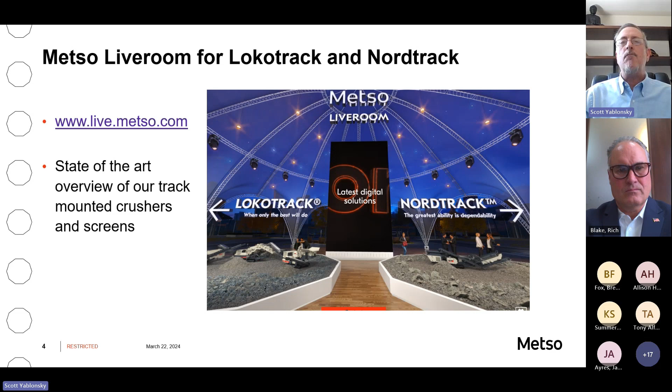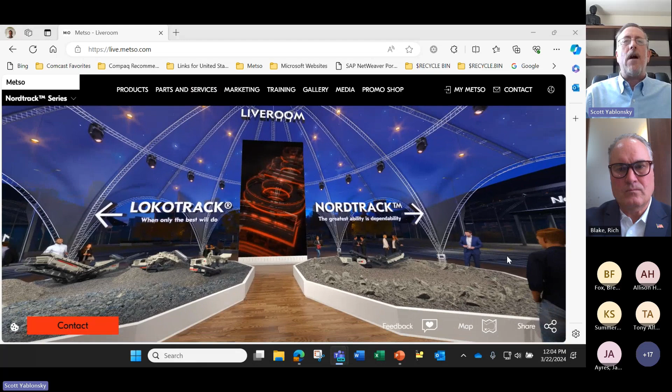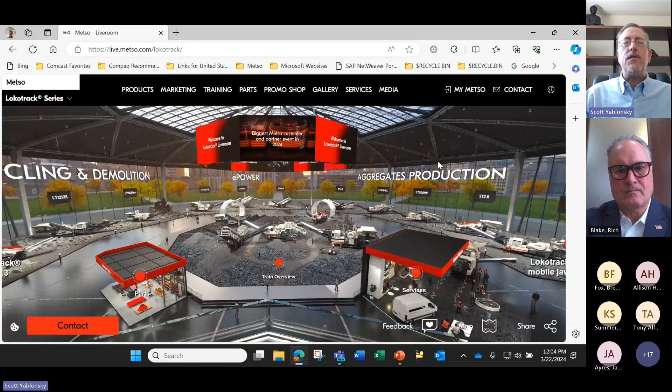So what we're going to do is go into the Metso Liveroom. It's our state-of-the-art overview of track-mounted crushers and screens, along with aftermarket, marketing, training, etc. When you type in live.metso.com, this is the screen that comes up. We have our Lokotrack and we have our Nordtrack. We're going to go into the Lokotrack. So this is our Liveroom. It's the state-of-the-art way to market our machinery, in addition to all of the technical specifications, what the machine does, the size, the capacity, all of that is included.

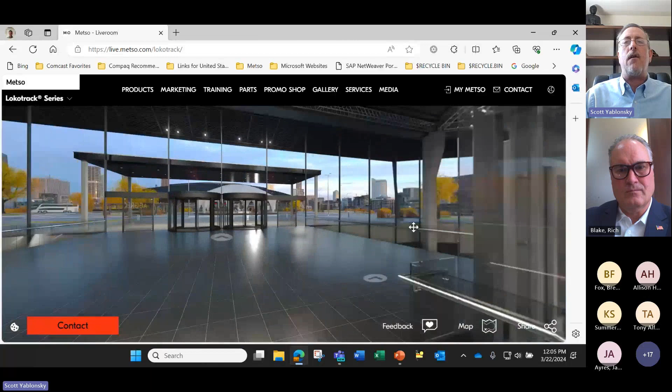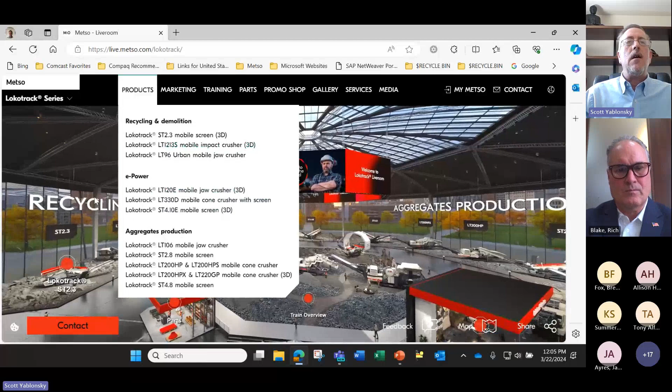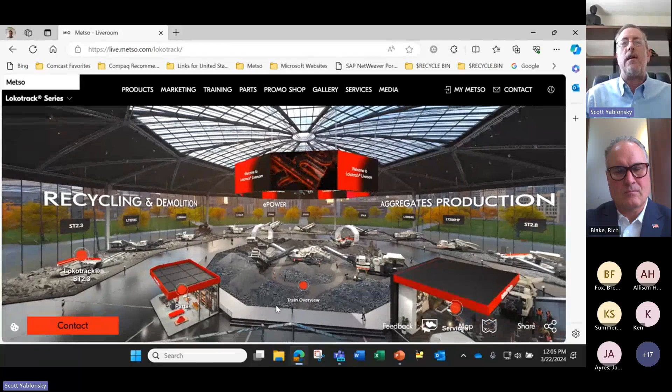So we can go around the room with our mouse, all 360 degrees around. We can also look at the products on this list right here. We have all our machines: impact crushers, jaw crushers, cone crushers, and screens, etc. This is how we make big rocks into little rocks. So we look at this ST2.3, which means screen on tracks. LT is a Lokotrack, which is basically crusher on tracks. We didn't call it a CT, unfortunately. And we can click on anything and find out about it.

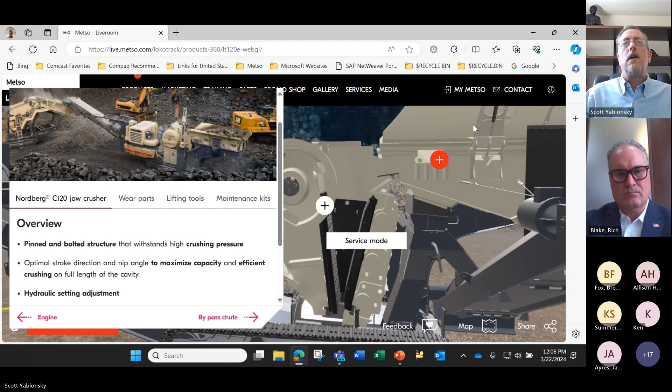This is a jaw crusher, the first jaw crusher in the process. You can just click on it, look at it in 3D, and we can rotate it as quickly as it loads, which is pretty quick, about 5 seconds. So we can go around the machine. Anything you have a question on, say, the jaw itself, you can see the jaw in action. That's how it works. There's also information. Let me go back into this. Anything that you guys want to know about this machine is in here.

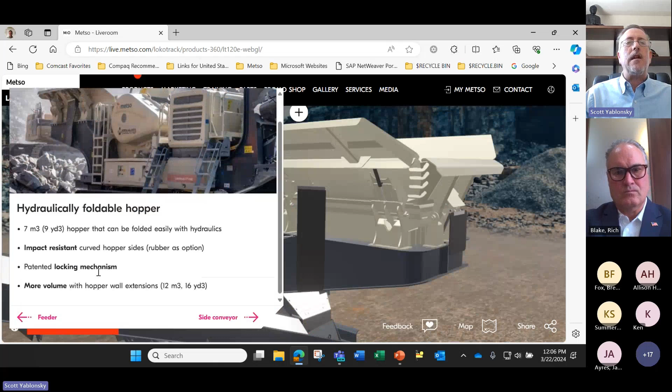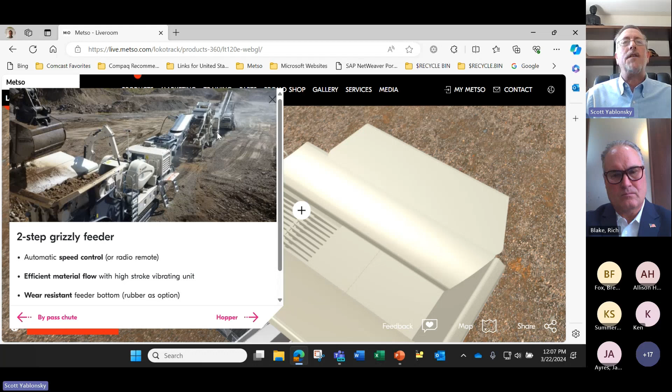You want to know about the feeder, which is basically sitting right here. You load the material on here. The feeder lets the smaller stuff go by because you don't want to crush smaller stuff, it's already small. So the rock goes into the hopper here. It goes over what they call a grizzly feeder. And the bigger stuff goes into the crusher, comes down, comes out this conveyor and feeds on to the next process part of the unit.

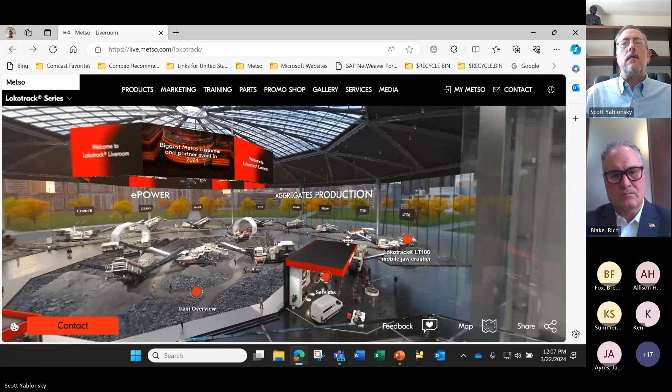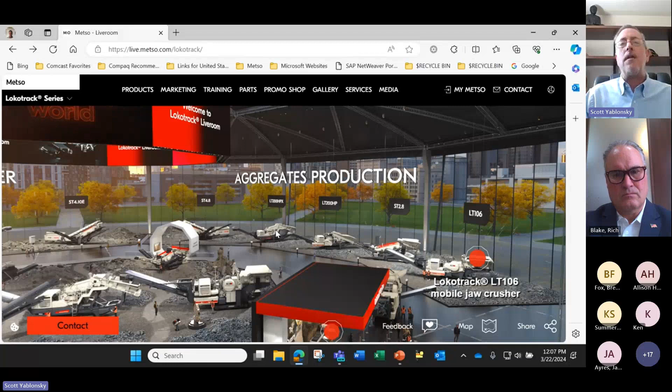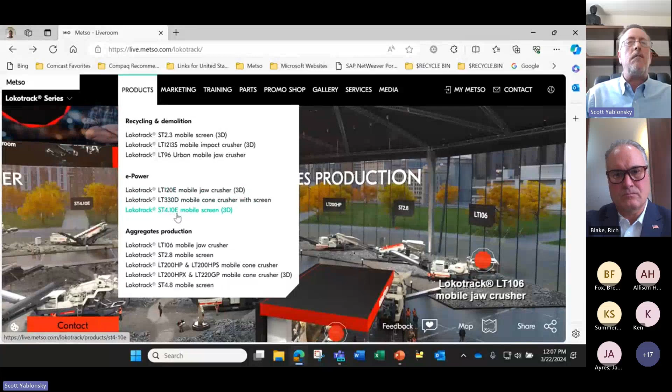Let's go into, say, a screen now. And this E nomenclature indicates it's a diesel electric. You can either push a button and start the diesel engine, or you can plug the machine in to the electric grid. It's basically like plugging in your TV. That's how it goes. This is the power source. We would plug it in and run the machine.

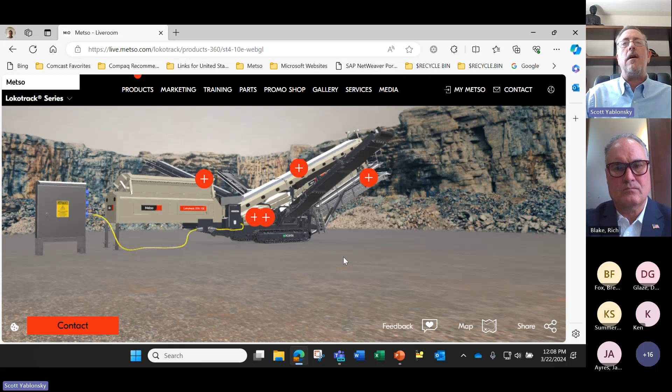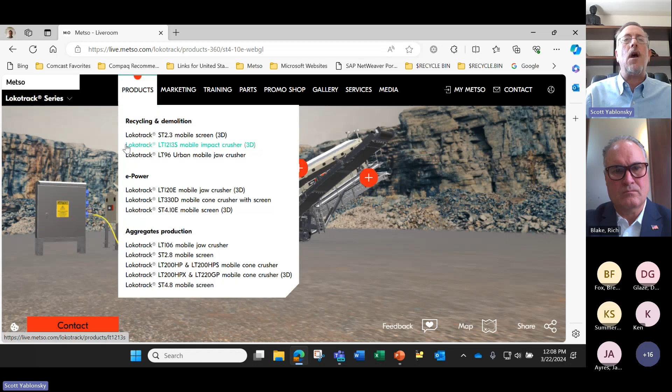We have marketing, we have training, we have parts, we have a promotional shop in here. We have services, screen media. So this is a one-stop shop for any track-mounted crusher or screen need that Metso provides. So that is what we call the Liveroom. I'll go into one other machine and then we'll move on to the next portion of the program.

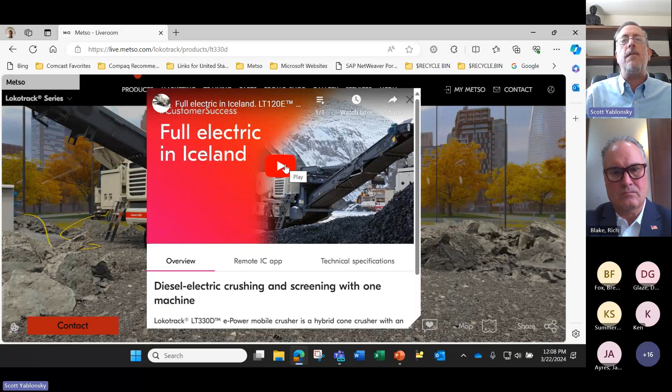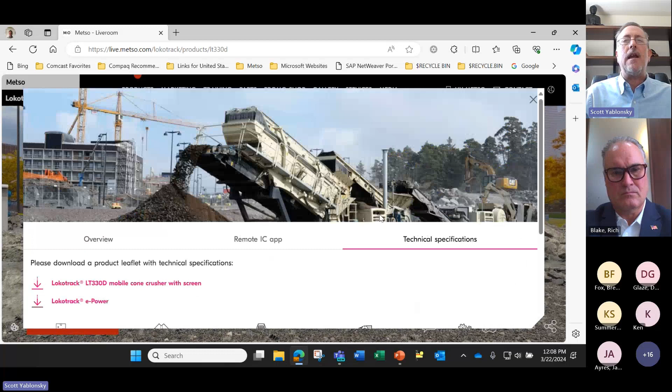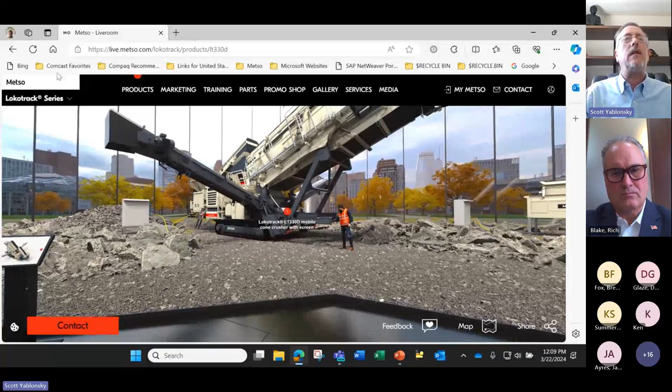So this, we can see YouTube videos. We have remote IC, which is a remote way to control the machine. Technical specifications on anything and everything on the machine. So like I indicated, anything and everything you want to know about this Lokotrack and or Nordtrack crushing and screening is included in this live room. And it's very, very interactive. Just like anything else on the internet, it's the way to go.

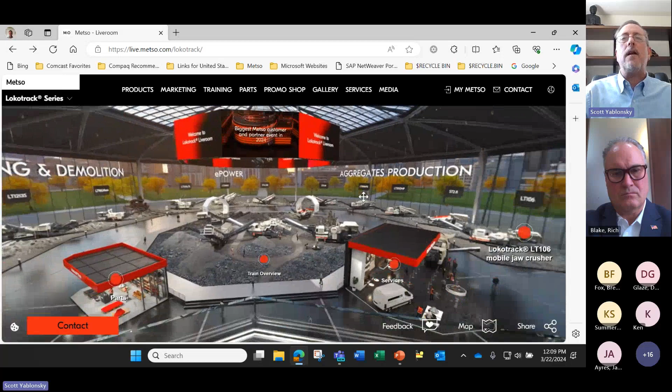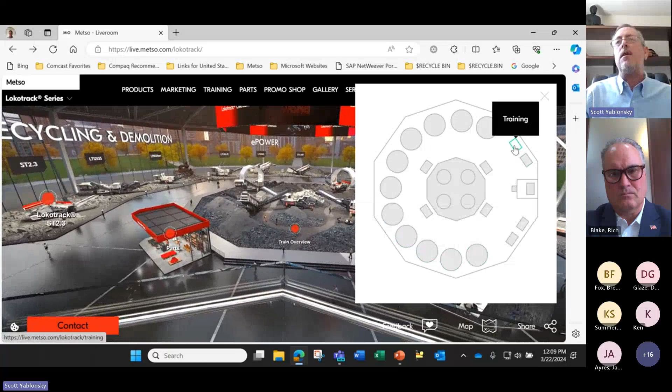Services is down here. You can hit a map to look at what you would actually like to review in the live room. Jaw crushers, impact crushers, screens. We have a marketing table, training, the gallery. So this is a perfect way to, at midnight, take a look at what we have to offer. And then you can call up Metso, ask them any questions that you have.

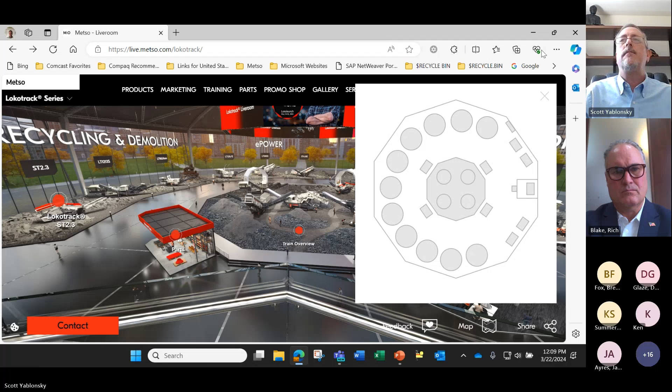So we'll move off of the Live Room and we'll go on to the next portion of the program, which is our HRC8. So this is the way we're going to do it. Metso Live Room, we just did it. HRC8, then we'll talk about Ag 1, and then we're going to introduce the 350E at Ag 1. So first, we're going to talk about this HRC8 crusher, which is one of the simplest crushers that we offer.

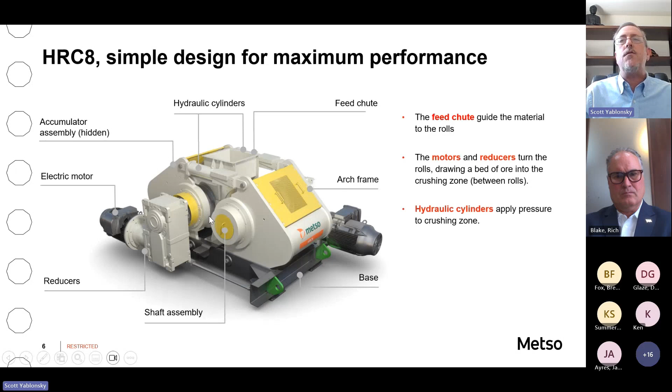This is the way it's manufactured. We have two motors. We have a feed chute that guides the material in between the rolls, and I'll get into how this works later. Motors and reducers turn the rolls, drawing a bed of ore or material into the crushing zone. So material goes in here via a conveyor, and then it gets crushed in between these two rolls, and hydraulic cylinders apply the pressure to the crushing zone.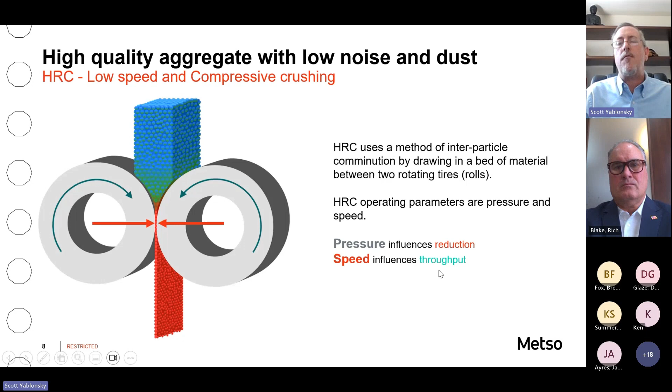The best part about this machine is it takes everything, all in feed. Usually crushers do not like fines because it's already fine material. So why put already fine material into a crusher? You would bypass that machine and put it into a stockpile where you would have a pile of the same size rocks. So you can put anything into this machine.

We have high abrasiveness, low crushability. You can put moisture in it. A lot of crushers don't like moisture. A lot of crushers don't like fines in the feed. A lot of crushers don't like clay or sticky feed. This machine can do it all. Like I said, the only limitation is the tons per hour or the production. It's flexible. It makes good shape. Very difficult applications. Very low energy consumption, low vibration, low noise. This is one of the simplest machines that we offer.

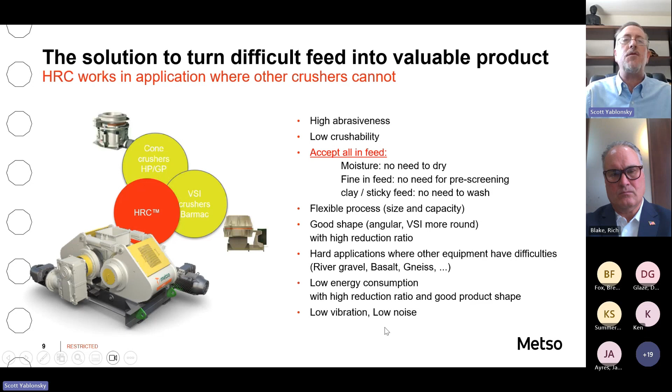For instance, if this is the feed to the crusher, both of these types of materials, and it's very small. This is millimeters. So you know how small 2 millimeters is. It's like that.

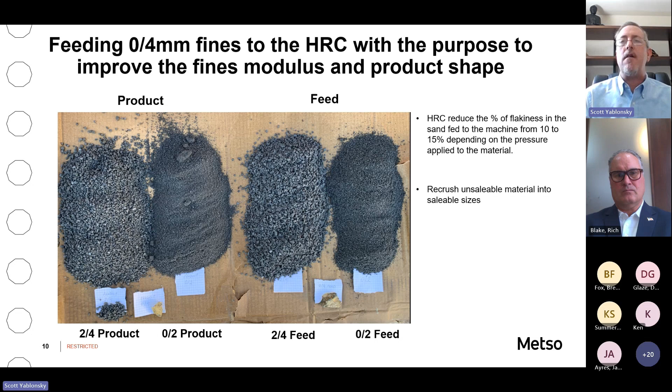The other well-known application for this crusher is recrush unsaleable material into saleable sizes. So if you happen to have, say, something called a 57, which is 1.25 inches by 1/2 inch size rock, and you can't sell that rock, well, put it in this machine and you can sell it. You can put 1.25 inches in, get 1/2 inch out, and that's a saleable material in most cases.

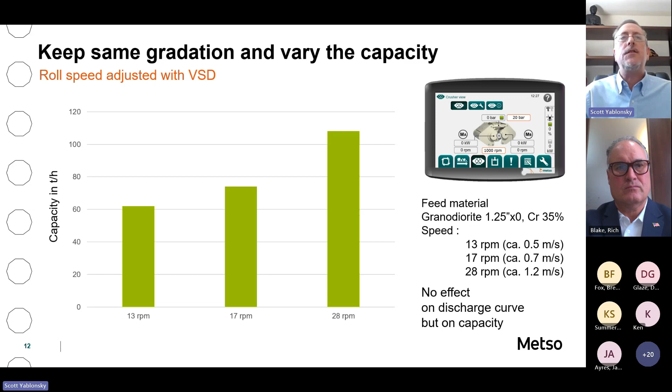Scott. Yes, sir. Setting control. Is there a setting control similar to what you might see on a cone crusher or a jaw crusher, or is it just based upon pressure? It's based upon pressure only. There is no closed side setting as a conventional cone crusher, jaw crusher, impact crusher. It's based upon speed and pressure.

And we also like this machine to be choke fed. Every crusher likes to be choke fed. What choke feed means is full. We'd like the whole entire chamber full of material so we can get rock on rock crushing, or something called interparticle comminution. If you get anything out of this class, interparticle comminution is the term, where we have rock on rock breaking through this chamber, but it's not just the rolls crushing the material, it's the rock pressing against each other in this machine and coming out finer.

So this is the feed. This is where it gets crushed the most. But here, it's starting to crush with rock on rock. And you can tell this is a larger rock than it is coming out. And that's the goal. And you can see how fine this feed is going into the machine. So it's going to do whatever you put in it. It's going to crush it.

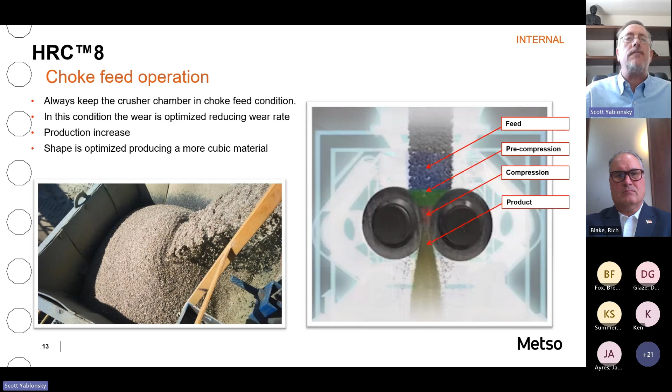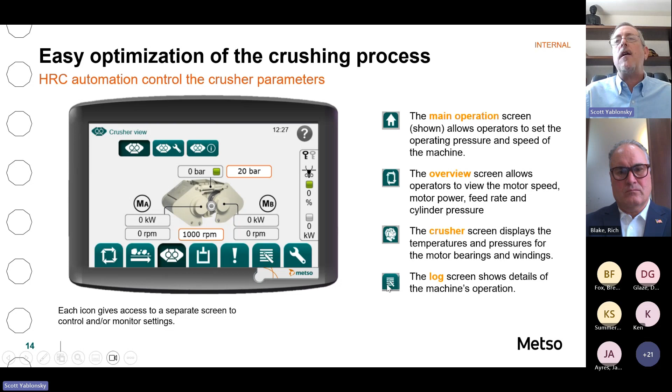As I indicated earlier, it comes with an automation package. It allows you to monitor speed, pressure. This icon allows you to view the motor speed, the power, and the feed rate, along with the cylinder pressure. This icon monitors the crusher, motor bearings, temperatures, pressures, and windings. And the log shows details of the machine's operation.

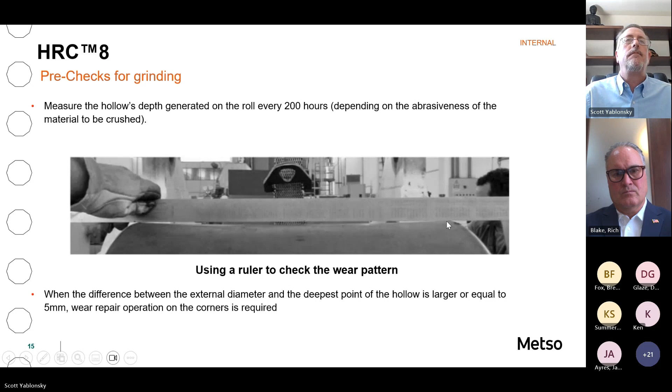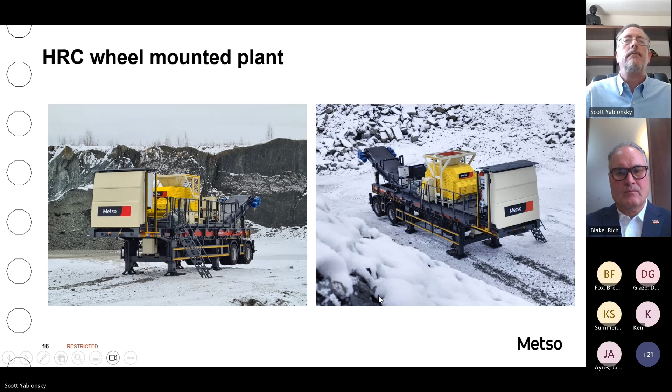And that's the HRC8. Very simple, very versatile machine versus a jaw crusher and a cone crusher. We would use this possibly in place of a VSI. We could use this possibly in place of an HP cone crusher in a tertiary or quaternary position, which would mean the third or fourth crusher in the stream.

And the way things work in a quarry is you start with a grizzly feeder, you go into the primary crusher, you go over a screen, you go to another crusher, you go to a screen, you go to another crusher, and then you close circuit on that machine. Closed circuiting means whatever doesn't fall through the screen will go back to the crusher to be recrushed.

Next on the agenda is AGG1. That starts on Monday, March 25th, and lasts to Wednesday at 2. In Nashville, Tennessee, Metso's booth is number 511. It's a 20-foot by 20-foot booth. This show is going to have over 400 exhibitors and 11,000 attendees.

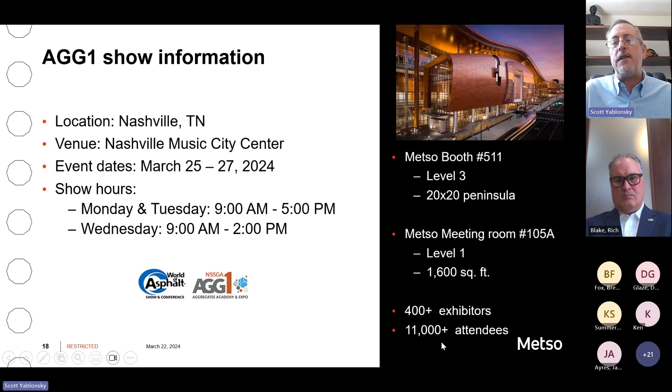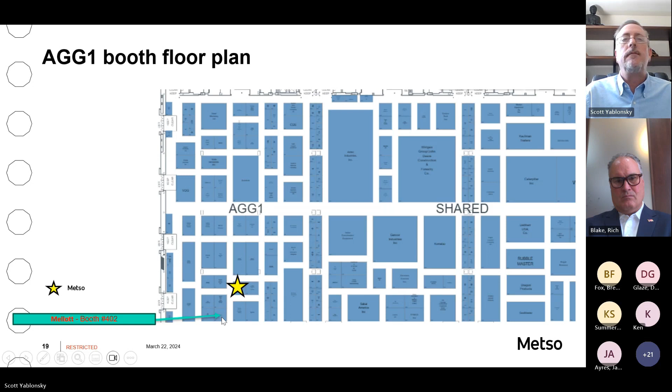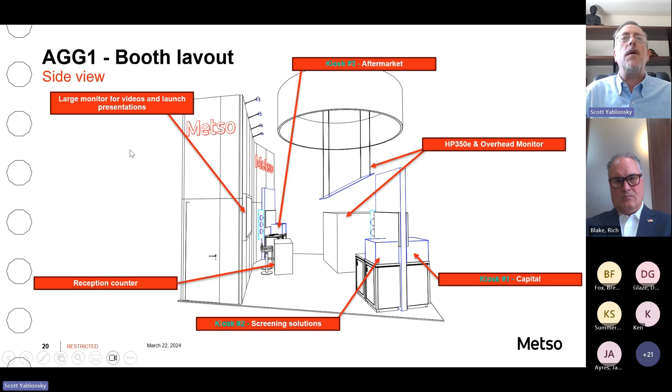Here's a map of the floor plan of the booth layout. Metso is going to be where the star is, and happy to say that Mellott's right next door in booth 402. Here's a look at what our booth is going to look like. We're going to have 3 kiosks, one for capital, one for screening solutions, and one for aftermarket. We're also going to have an HP 350E in the booth as well, along with monitors for videos and presentations.

Here's a detailed explanation of what's going to be at each booth. The biggest item in the booth is going to be our HP 350E, and I'll explain that machine in a moment. Kiosk number 1, the capital. We're going to have a 3D printed HRC model, which I just presented, the HRC8. We're going to have Lokotrack and mobile equipment, brochures, modules, and an overhead monitor displaying video of the HP 350E crushing.

Our second kiosk, screening solutions including media and parts. We're going to highlight our newly launched TSE series with a 3D printed model, our newly launched CSH and CXH, which is the initials for our new SH and XH launch, which is the Ripple Flow SH and Ripple Flow XH Spadala screens being relaunched, which will be our North American screen line.

We have Metrics for screens, which means it'll monitor the temperatures and pressures on the screen. It'll check for racking and irregular motion. And we'll also have screening media, which we'll portray on a video.

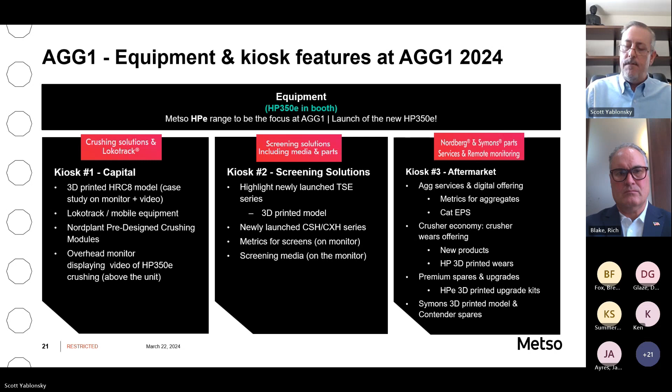So our customer launch event, we're very excited to launch the HP 350E. Please join us at booth 511 at 3:30 on Monday. We're going to have refreshments and music starting at 3. We're going to have a welcome program by our VP of Americas, Steve Cianci. We're going to have the HP 350E cone crusher introduced by our product manager, Ilka Samero. We're going to have our screen launch by our general manager, Travis Schultz.

We're going to talk about Metrics with Mira Terni from Finland as well. She's the VP of Aftermarket. And then we're going to have some closing comments by Steve, followed by music, refreshments, and networking for 30 minutes. So we're going to be there for a good hour. Please join us.

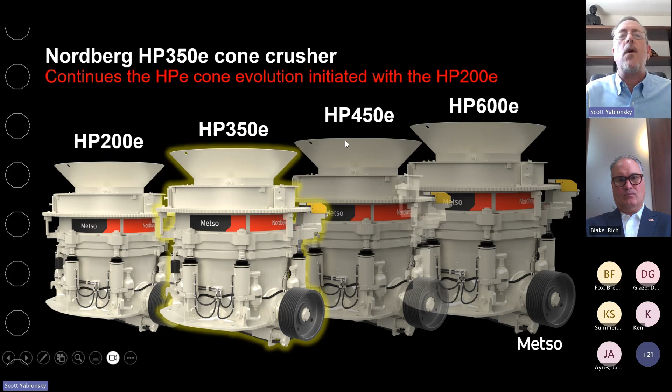Now the excitement is here. The Nordberg HP 350E. What is this HP 350E? It's a newly designed crusher that is a sister crusher to the HP 200E that we launched last year at ConExpo. That is 200 horsepower. This is going to be 350 horsepower. The next one in line will be an HP 450E. And after that is a 600E. I think the 350E will be second in line, the 600E will be third, and the 450E will be fourth. Now, what's this E stand for? It stands for evolution.

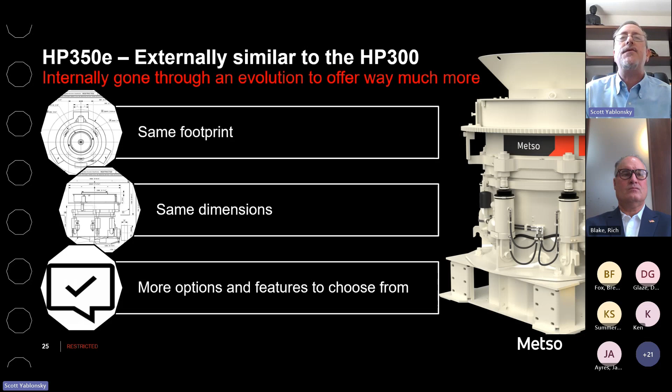The HP 350E compares to an HP 300 very, very closely. It's an identical footprint with identical dimensions. However, there are more features and options on the 350E versus our HP 300 that was designed in the late 80s. So we've come 30-some years to this HP 350E, and it's a great addition to our portfolio. We used to have an HP 300, which isn't going away, but we have this HP 350E that we're offering with much more increased and wonderful features that we'll get into in a few minutes.

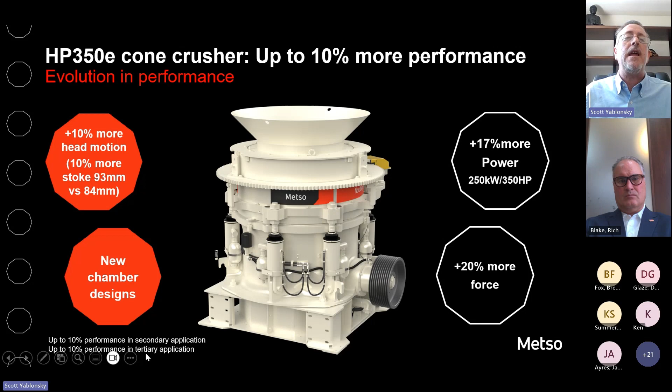The difference between the 350E and the 300 mainly is 300 horsepower versus 350 horsepower, which is 17% more power. We have 10% more head motion. Head motion means the head inside the crusher goes like that, so there's 10% more movement or stroke in the machine, 93 millimeters versus 84. We have some new chamber designs, meaning the liners inside the crushing cavity, and we have 20% more force, which translates into up to 10% more performance in secondary and tertiary crushing. Secondary is the second crusher in the line, tertiary is in the third position.

As I mentioned before, rock comes in the top here and fills this cavity and gets crushed between these two members. This is called the mantle, this is called the bowl liner. And now we have 10 different chamber profiles versus 8 in the HP 300. We have 2 revised and enhanced profiles, the coarse and extra coarse, but we have 2 new profiles, a sand and a fine cavity, which is very good for small feed making sand.

And the best part about this offering is there's no backing that we have to worry about. Backing is the epoxy, or the glue you would call it, that sits behind this piece, which we call a mantle, to keep it in place. And I'll show you the difference between what we have in the HP 300 and the HP 350 in a moment.

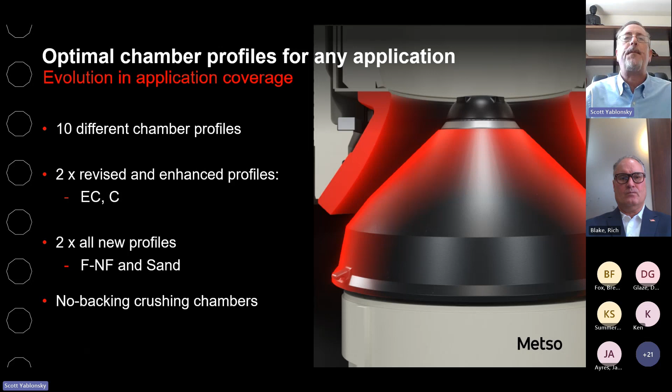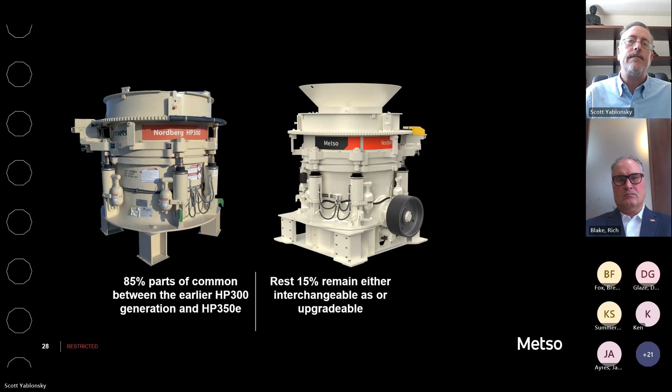This is the older HP 300, and this is the newer HP 350E. 85% of the parts are common between these two machines. The other 15% are either interchangeable or upgradable to the HP 300. The E-feature upgrade possibilities for HP 300 units.

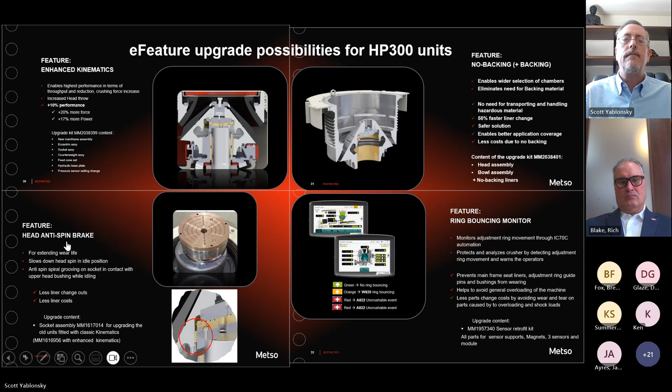So we can put these parts in an existing HP 300 to make it more like an HP 350. So we can upgrade the HP 300 options, and let's get into them. We have enhanced kinematics, we have no backing, we have a ring bounce monitor, and we have a head anti-spin brake. Right now, the current HP 300s do not have any of these items. So let's get into each one of them.

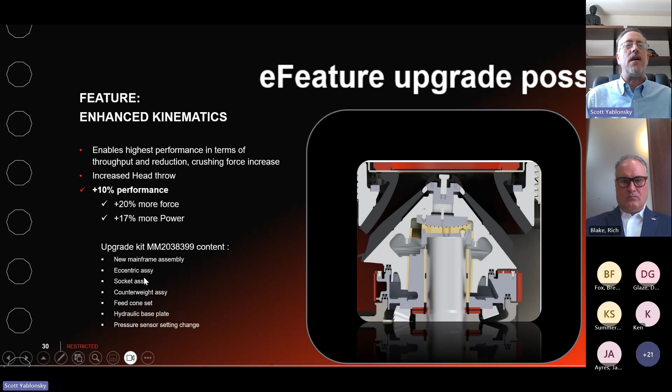Enhanced kinematics translates into 10% more power, more performance, 20% more force, and 17% more power, as I indicated earlier. Now, if you have an HP 300 right now and you want to switch it over to the HP 350E options, you'd have to buy all these items, which may not be something that happens regularly. If you want more performance, more production, you can change your existing HP 300 into the 350E with these items: new mainframe, new eccentric, socket. A lot of these parts have to be changed.

The no backing portion of the machine. This is one of the better options that we have because we have no need for backing material. Backing material is hazardous. It has a shelf life. It's not fun to change liners using backing material. You have to wait at least 8 hours for the backing material to cure. With this machine, you unscrew the feed nut, you take the mantle off, you put the mantle back on, and you screw it back together. It's at least a 50% faster liner change, meaning it's a safer solution. Less cost due to no backing.

And you can change this HP 300 into a 350E with the no backing option by buying a head assembly, a bowl assembly, and obviously the liners themselves. So you'd have to buy this part, the bowl, and then the mantle itself. Now, no backing versus backing means the seating surface on the head is longer. Therefore, we need more metal to come in contact with the other metal, which would be the mantle, to be able to not put backing in there. So there's such a large seating surface on the head to make contact with the head and the wear surface.

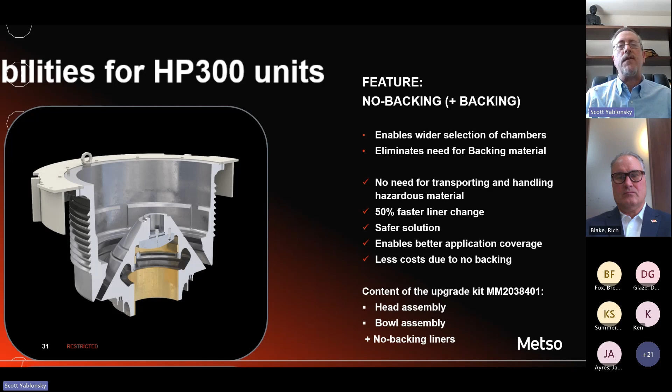Anti-spin brake. This means you have less wear on the machine. The way the HP 300 runs now is the head spins in one direction. When material hits it, it stops the head and turns the other way for crushing and production. With this machine, it just slows the head down using a spiral groove on the socket that comes in contact with another piece in the machine called an upper head bushing. And it's illustrated right here. It's almost friction. To put this anti-spin brake into this machine, all you need to do is change the socket assembly.

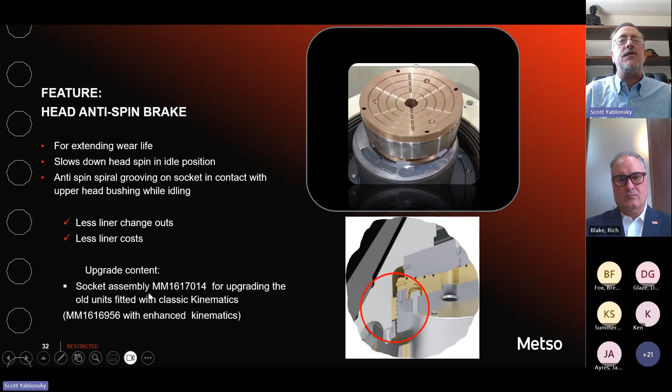And last but not least, we have this ring bounce monitoring system, which is very, very good in preventing crusher damage. It monitors the adjustment ring movement of an IC70C automation, which is what our automation is called. Now, what ring bounce means is it's exceeding the force of the machine. There's three limits on the crusher: volume, force, and power. Volume, obviously, if you fill the machine, there's no room left. Force, if you exceed the force, this occurs. Ring bouncing, which can and will destroy your machine after time.

This ring bounce monitor protects and analyzes the crusher by detecting adjustment ring movement and warns the operator. If you get an orange light instead of the green here, you're starting to bounce the ring. If you get a red icon, you're having problems. You're having uncrushable, which means a piece of steel, a piece of wood, a piece of rubber. Rubber can't be crushed, wood can't be crushed, steel can't be crushed. We're crushing rock. So we have an uncrushable event. That's probably not a good day.

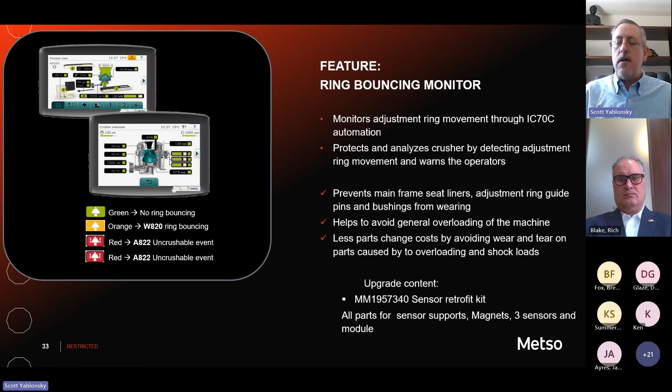A sensor retrofit kit is all you need on your existing HP 300 to upgrade it to a ring bounce monitor. And this is what it looks like. This is the sensor, monitoring this right here. If this is moving, this bushing could get oblong. It could damage this area because this whole piece, oh, sorry about that, this whole piece is moving. You probably can't see it, but you'll notice it on the automation, because it is so sensitive the automation will pick it up.

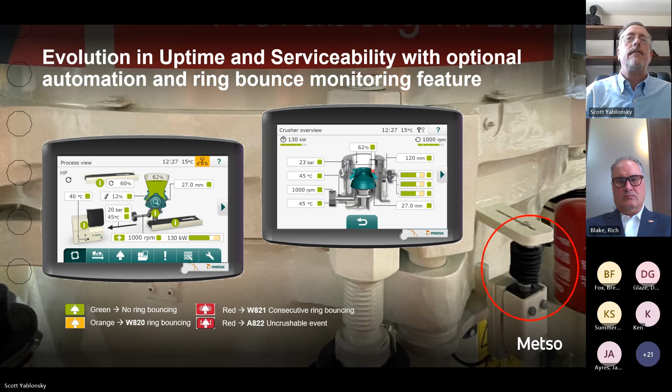The new crusher robust mainframe assembly is standard with the HP 350E and can also be added to an HP 300 if desired. It's compatible with old and new HP 300 crushers. And we're not sending away the HP 300. We're just adding the 350E to our portfolio.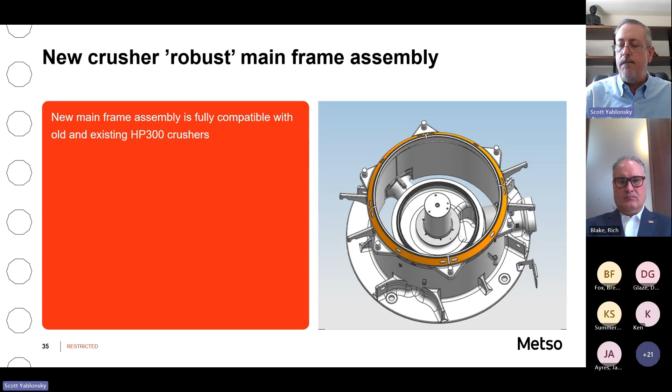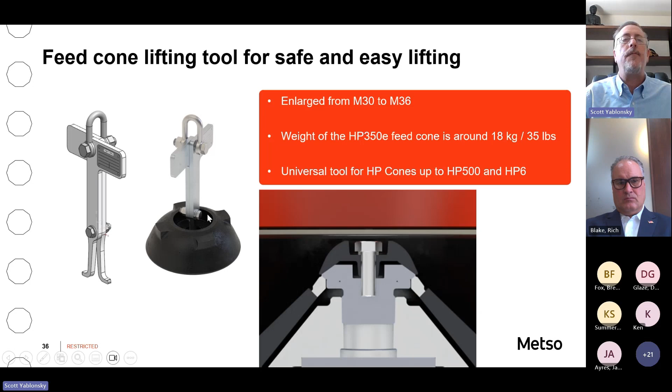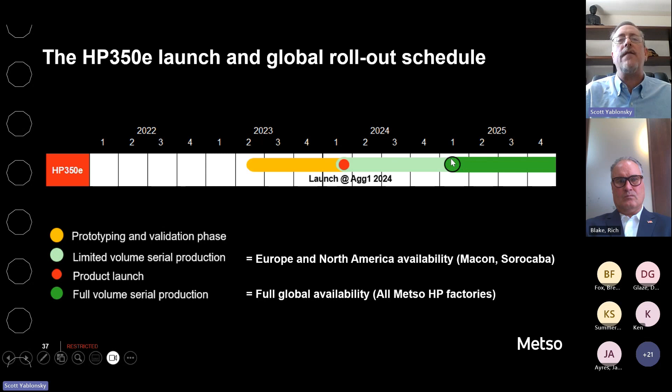And that's your HP 350E. We're very excited about this machine. It's quite a change from the old HP series due to all the new features, and we're ready to go with this machine. Ilkka Somero is going to be there to give you a more detailed overview of this machine next week. We'd love to see you.

Scott, it seems like the E stands for excitement. It is excitement. There's a lot of things you can say with this E. It's a very, very exciting change. It's what you call the 2024 crusher, not the 1988 crusher. It's very, very exciting. Any questions?